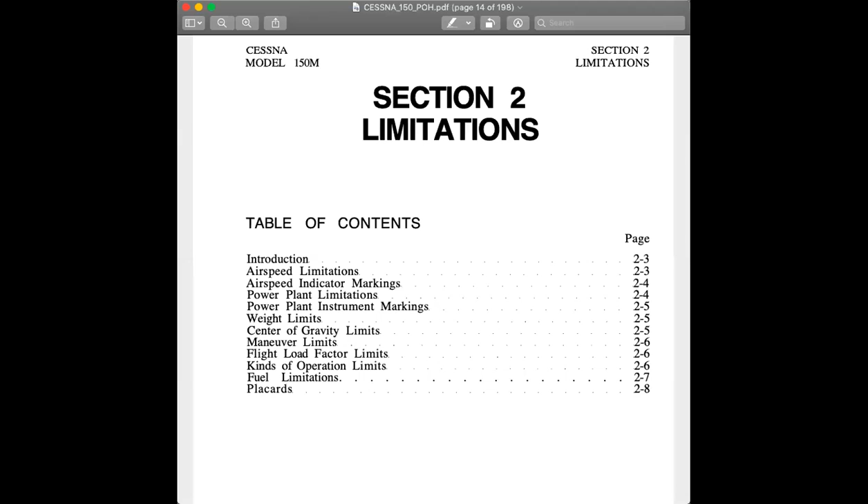Let's move to this - you're looking at a Cessna 150, 1977 POH. I saw it looked like there is a 150 associated with Girls Love to Fly, so I figured this would be an appropriate section to look at.

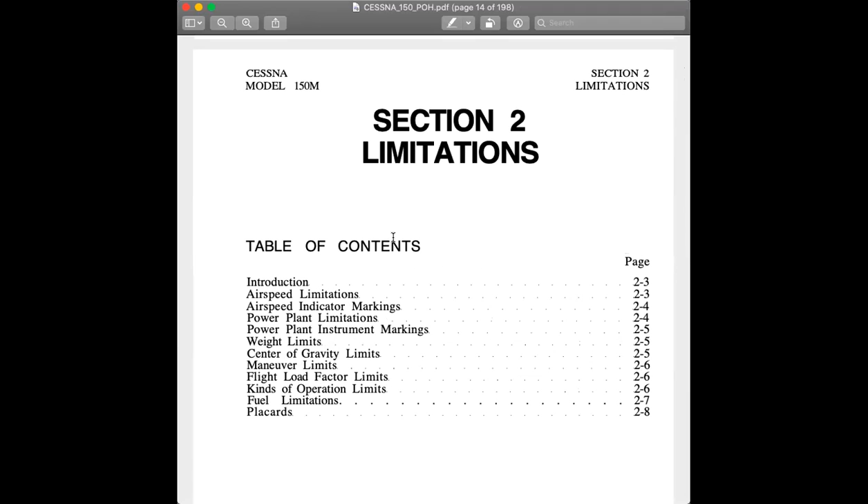Overall aircraft limitations - the limitations on any airplane are there mostly to keep everybody safe, and obviously these airplanes are not indestructible. So by having aircraft limitations and being familiar with and knowing our limitations, that helps us operate within, and ideally up to, the full operating envelope of our aircraft, taking advantage of every ounce of performance it has, while still understanding where those limits are, so we don't put ourselves in any undesired aircraft states or hurt the airplane.

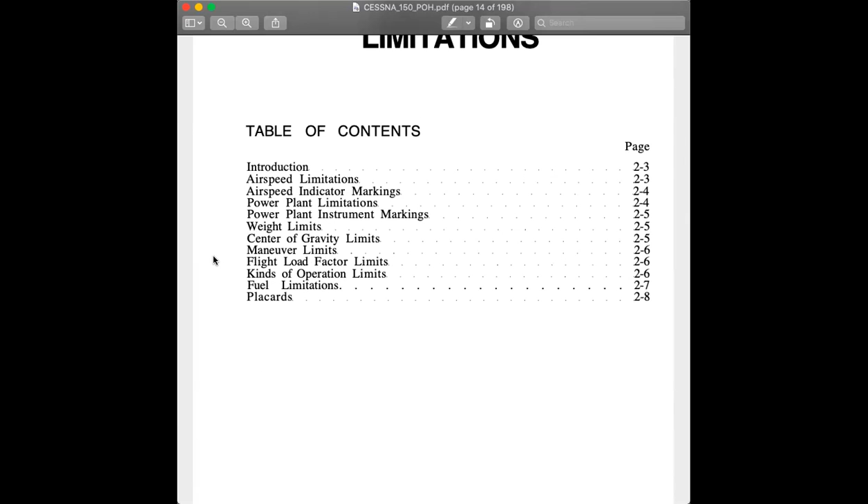Where these limitations really come in - just a couple notes in the beginning - especially I like to stress this with older airplanes: when you're looking at airplanes from the last century especially, the training fleet is aging. So definitely take into account that even though your aircraft POH or flight manual publishes the limitations, there might be a difference in terms of what you actually experience in the airplane.

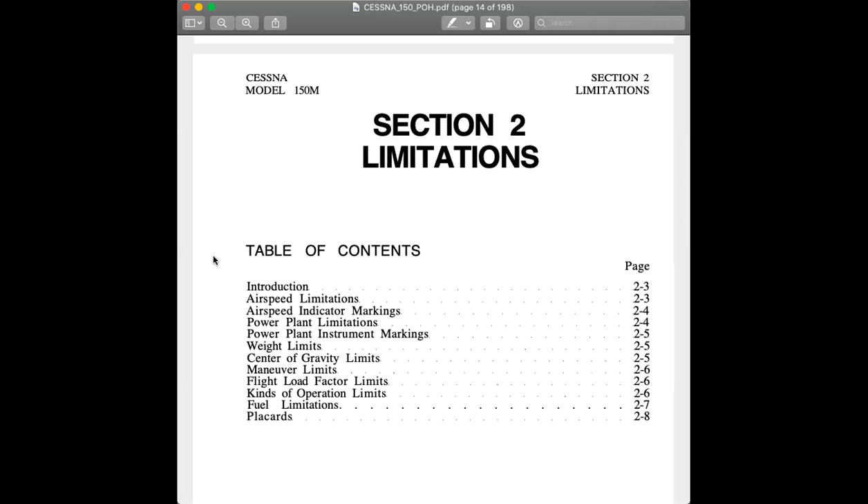I say this because just because the airplane was certified to a certain standard when it was brand new, does not mean that 40 years later that airplane can be expected to measure up to those same standards after training potentially hundreds of pilots and being beat up for a number of years. So definitely take all of these with a little bit of a grain of salt as we move through some of this.

So off the bat, everyone's mostly familiar with airspeed limitations, right? We're generally associated - the first thing we think of with limitations, we think of airspeeds, right? V speeds specifically - mainly, that's just the maximum speed or the minimum speed you need to be at for certain maneuvers. There's always a speed we seem to associate, but a lot of people don't necessarily dive into why these speeds exist or what that looks like from an aerodynamic standpoint. It's just a number that we're taught, and we just kind of accept that number.

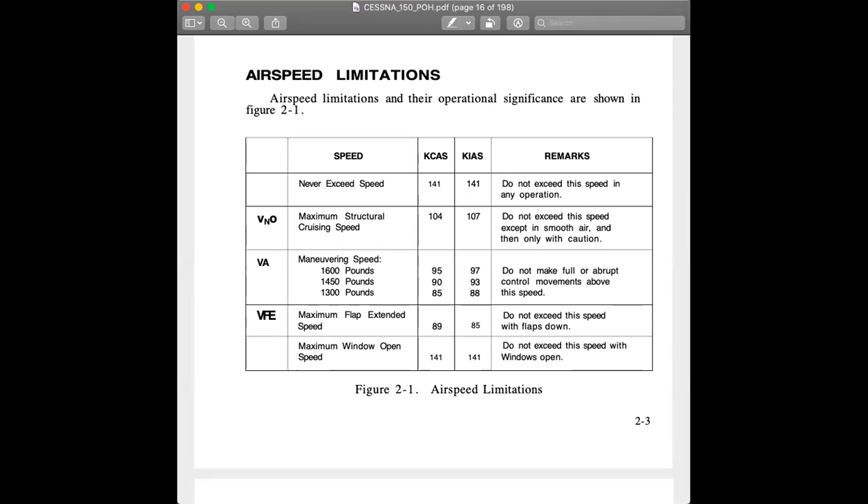VNO, max structural cruising speed. The POH limitations section is really good at just saying, here's the speed, this is what it means. Every manufacturer does have a little bit of a different interpretation of this. They're generally supposed to fit into the same mold, but sometimes you'll see that manufacturers do exercise a little bit more discretion when it comes to these speeds.

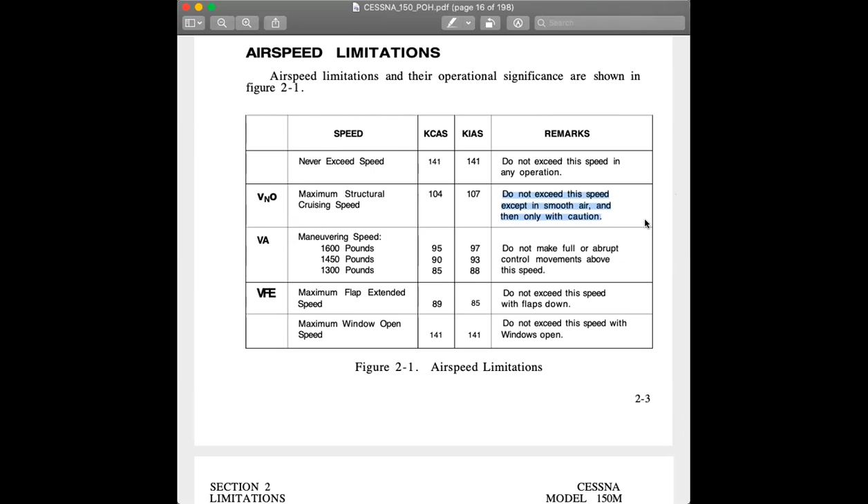VNO, how do we normally indicate this? Anybody have any thoughts on how this is normally indicated on your airspeed indicator? The yellow arc. Thank you, Christine. I appreciate that. And I'm going to just start calling on people at some point. So yes, yellow arc, maximum structural cruising speed, right?

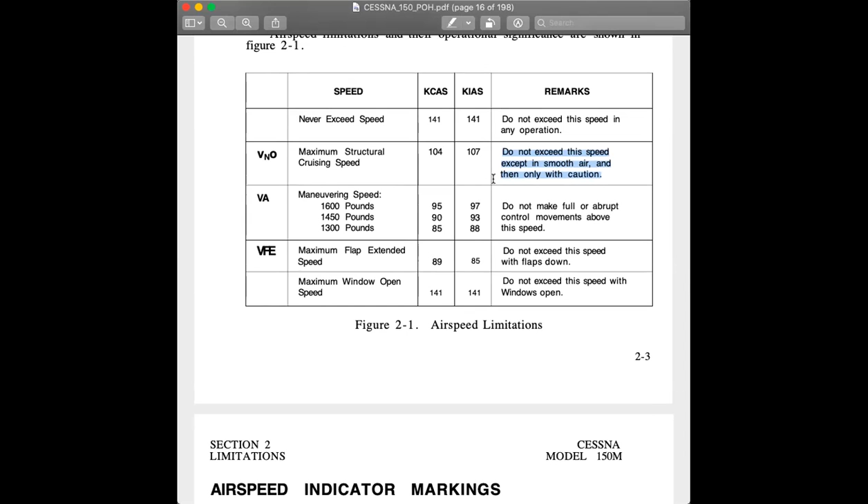And that's a speed that says do not exceed this speed except in smooth air, and then only with caution. So this is one of those kind of debated topics. If you're doing an emergency descent or something of that nature, how fast do you really want to be going when you're going downhill, especially in turbulent air? If you're trying to put out a fire or something like that, that's potentially a consideration, especially if it's on the wing or up on the forward side of the firewall, in your cowling. But still, definitely a speed you want to take with caution if you're going to exceed the structural cruising speed and accelerate into that yellow arc.

Maneuvering speed. Okay, maneuvering speed. Let's see, what do we typically associate maneuvering speed with? Any ideas why we have maneuvering speed, why it varies based on weight or anything like that?

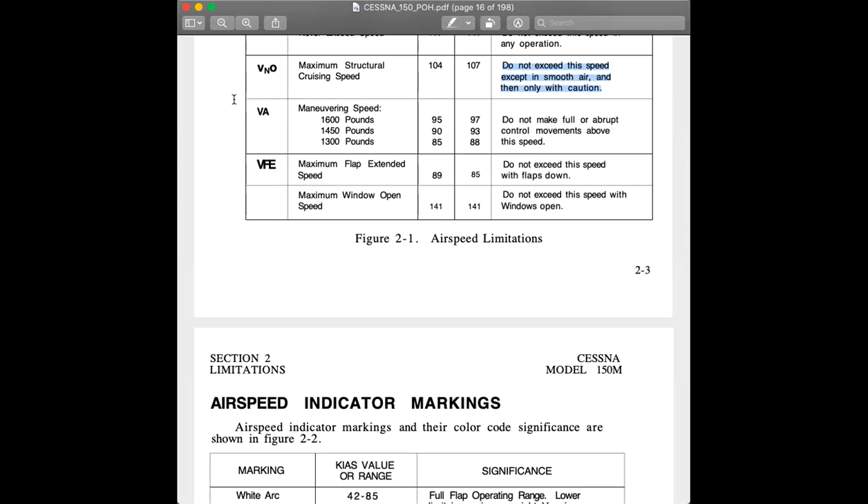Christine? Yes, I'm pretty sure it goes with the loading of the wings, right? So when we're doing heavy maneuvers, we increase the load that we put on the wings. And so that weight is very important.

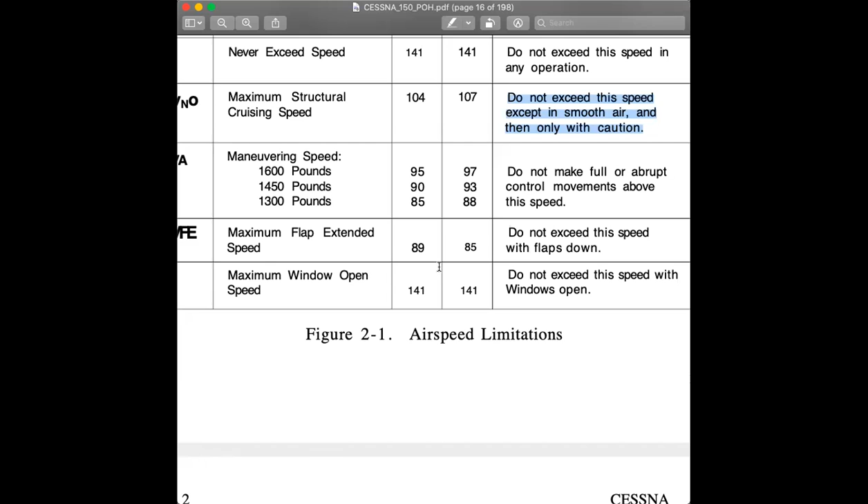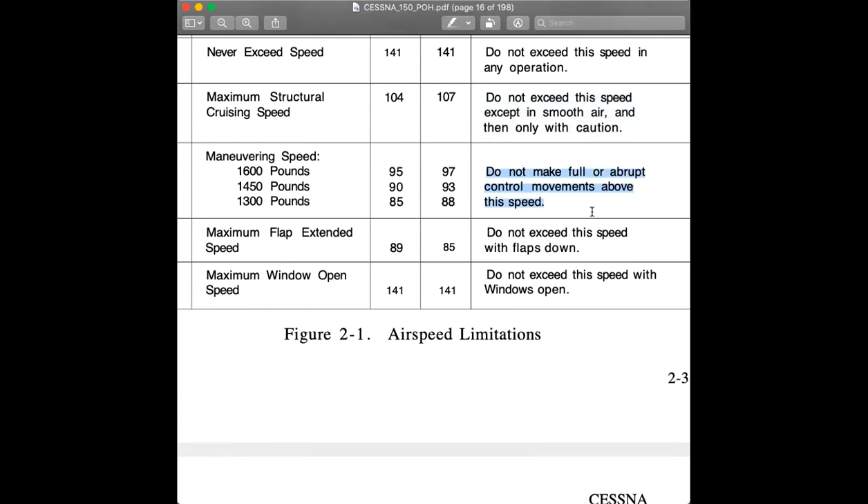Yeah, absolutely. So maneuvering speed, if we start with the description, it says do not make full or abrupt control movements above this speed. This is a 1977 POH, so it doesn't necessarily reflect what a maneuvering speed is, it just says don't make full or abrupt control inputs above this speed. And then it says here's some speeds, but also here's some weights. We can see that if this is knots indicated airspeed, as the weight decreases, the speed also decreases, and vice versa, as the weight increases, the speed also increases.

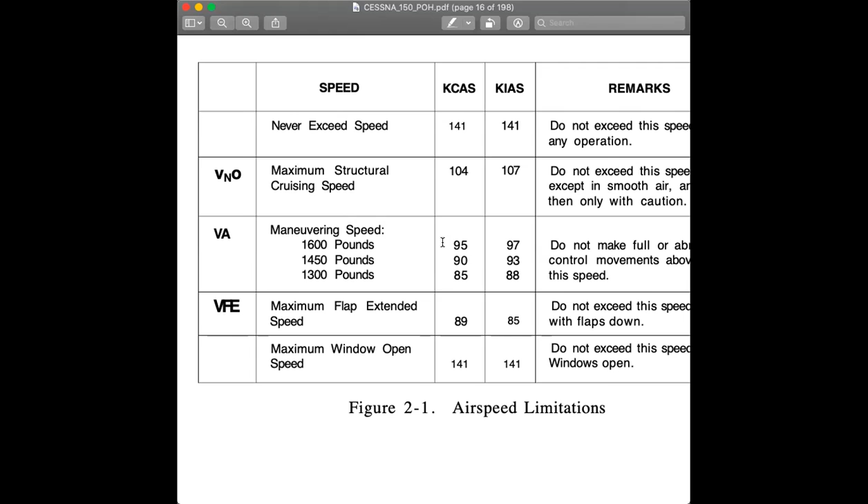But don't make full or abrupt control inputs above the speed, that doesn't really help us understand the why factor there. So that's essentially what we would call rote level knowledge, where it's like, okay, I understand this is the speed, don't do this, but we don't really understand why. So let's dive into that real quick here.

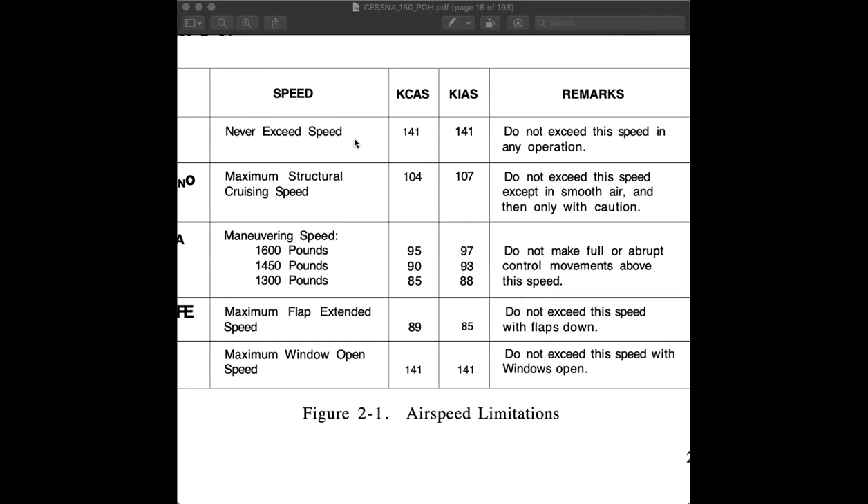I'm going to see if I can put a different window up. Let's go back to, there's a built-in whiteboard. Wow, okay, this is part of Zoom, that's cool. I'll use this instead of the proprietary one, I guess. Okay, so when looking at maneuvering speed, this might get a little bit mathematical, so feel free to stop me at any point in time here.

If we are looking at your average airfoil, try to bear with me here while I draw wings. I lost my stylus, didn't find it for the meeting, so I'm going to be using this as a trackpad. This is an airfoil, just pretend it's nice and round and smooth, and this line I just labeled right here, what line is this? Ideally going from the front leading edge to the trailing edge. Christine? It's the chord line.

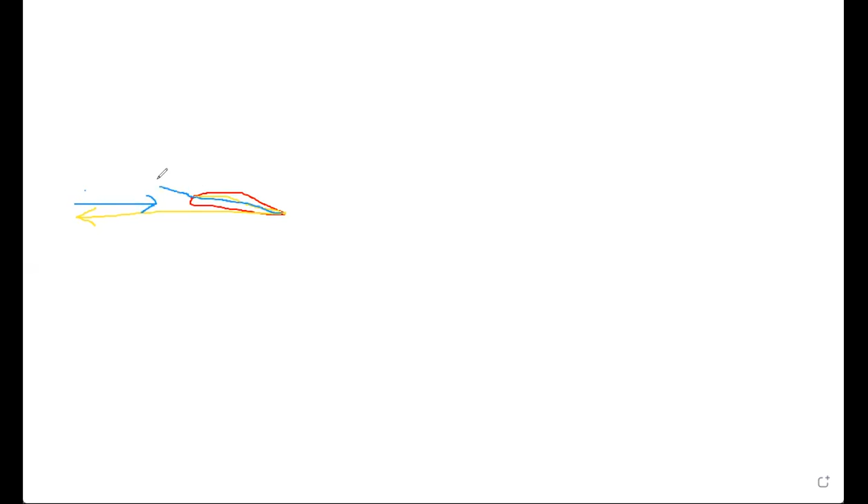Right, and the chord line is something that helps us figure out a very integral part of how our airplane flies, known as the angle of attack. So if our airplane is flying in this direction, the relative wind is always parallel and opposite to the flight path. So the airplane's flying that way, and the relative wind is parallel and opposite, going like this, then the relative wind is striking the airfoil up here at the leading edge. Now, if this chord line, again going from the trailing edge to the beginning of the leading edge, if we extend that in front of the airfoil up here, the angle between that chord line and the relative wind is known as what?

Let's see. DeVry? Lurking in the chat. Christine, I guess you're it today.

Sorry, angle of attack, right? Okay, so if we're going to look at this a little more mathematically and try to understand why maneuvering speed is changing, we first need to trust me here for a second and go with an out-of-the-box rote definition.

So VA is the speed at which you can apply full and abrupt control input in a singular axis without damaging the aircraft. Now, even that doesn't necessarily help us understand—it just says we won't damage the airplane. Well, how do we not damage the airplane? By applying full and abrupt control input.

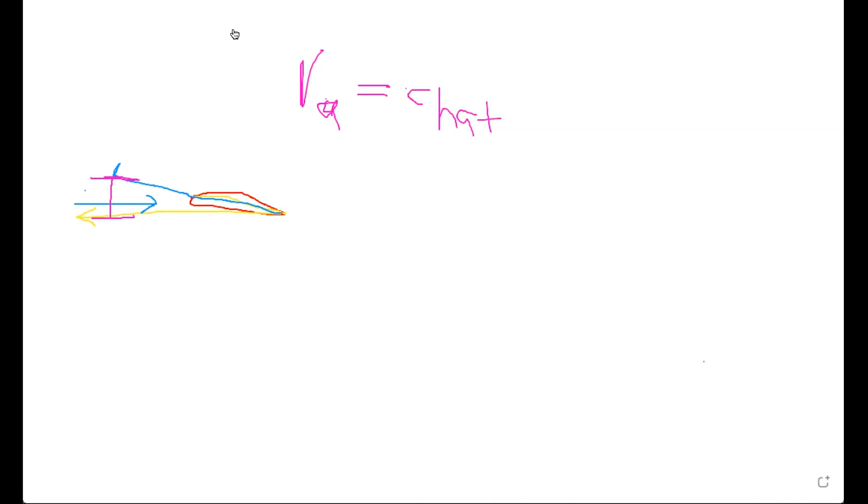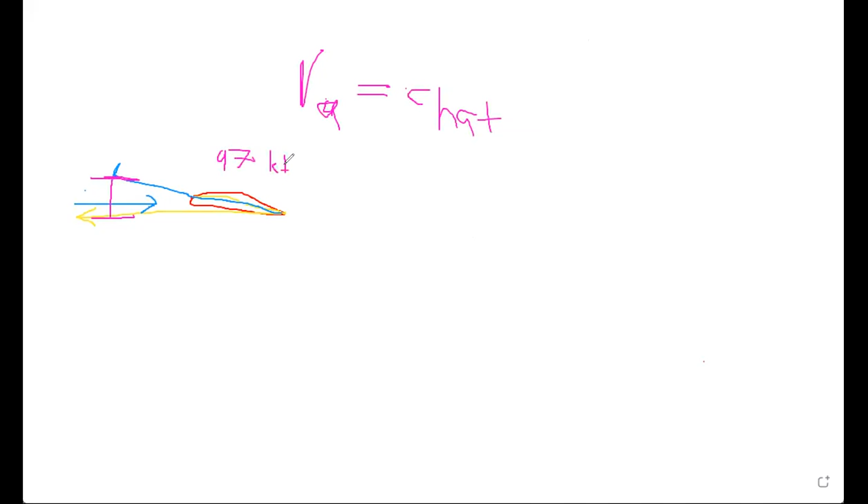So if we go back to the airfoil diagram here, let's go back to our POH and read those numbers. It says at 1,600 pounds, it's 97 knots. Okay, 97 knots, 1,600 pounds.

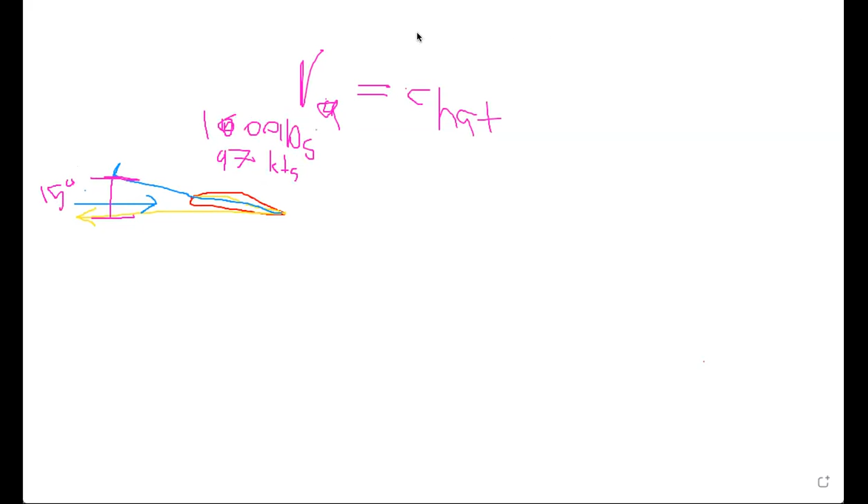So then you have a given angle of attack. At 97 knots and 1,600 pounds, you have this angle of attack, which we'll say is like 15 degrees—this is a somewhat arbitrary number. So if this is your angle of attack at this weight and speed, we're also concerned, if we're going to stall before we damage the airplane, that we need to hit the critical angle of attack before anything bad happens. So the critical angle of attack might be up here.

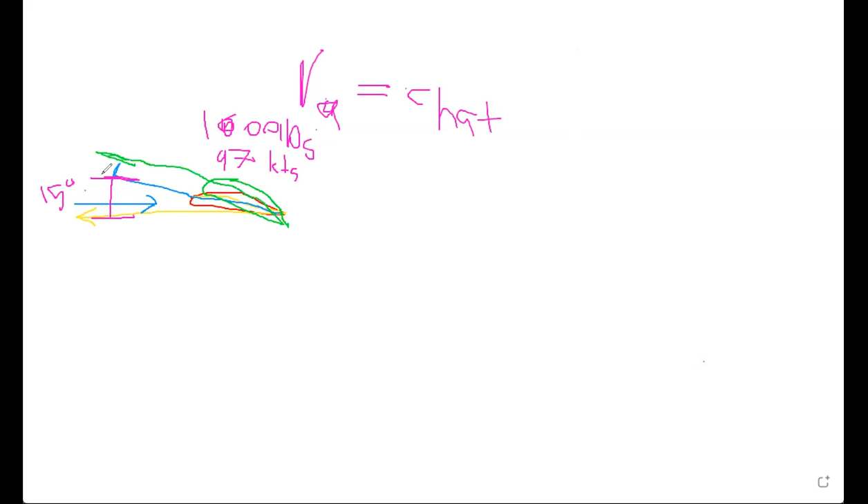Okay, so if the airfoil was reshaped and we increase our angle of attack like this—this is our new chord line—and it goes all the way up here, then this is the angle of attack we would actually stall at. So if we're at 15 degrees, let's say we stall at 20 degrees, then we have 5 degrees of angle of attack change. So if you're flying along at 1,600 pounds and 97 knots, and this is your angle of attack, you'll basically hit 20 degrees pretty quickly and you won't stall or break the airplane.

But now let's look at a different situation. Let's say, based on that POH, at 1,450 pounds it's 93 knots. So as weight increases for straight and level unaccelerated flight, what happens to angle of attack?

Christine, you're a CFI, right? I am, yeah. No worries, but it's Christina. Oh, it is, sorry. And I didn't hear your question, if I'm being absolutely honest. No worries, I was asking—I'm like, okay cool, you're a CFI, excellent, you can help me out here a little bit.

So as we're cruising along in straight and level unaccelerated flight, if we had two identical airplanes, and on one of those airplanes we just added some weight, what would happen to our angle of attack? I guess it depends on where that weight is. Okay, that's actually a good answer—that's how you got me on a technicality there.

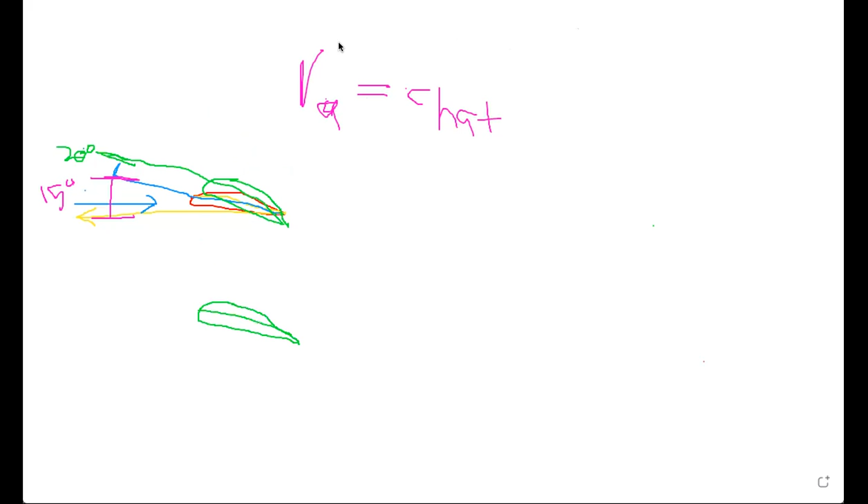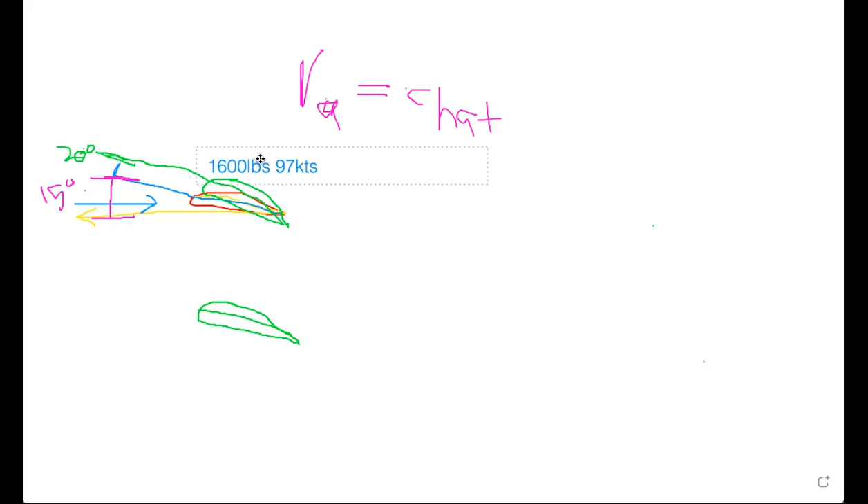So let's just say—and actually I figured out how I can do text, so I'm going to clean this up and make it a little more legible. Let's go 1,600 pounds, 97 knots on this wing. Nice, and I can move it. So then if this wing is, let's say, at 1,450 pounds and 97 knots...

Okay, so this wing here is lighter, right? The bottom wing is at 1,450 pounds. So if it's at 1,450, 97 knots, does it have a greater or lesser angle of attack than the wing above? It has a lesser angle of attack.

So in this case, let's say wind would be like this, because the flight path is like this. And then as a result—there we go, there's the angle of attack. We'll say, and this is not to scale, we'll say this one's at 10 degrees.

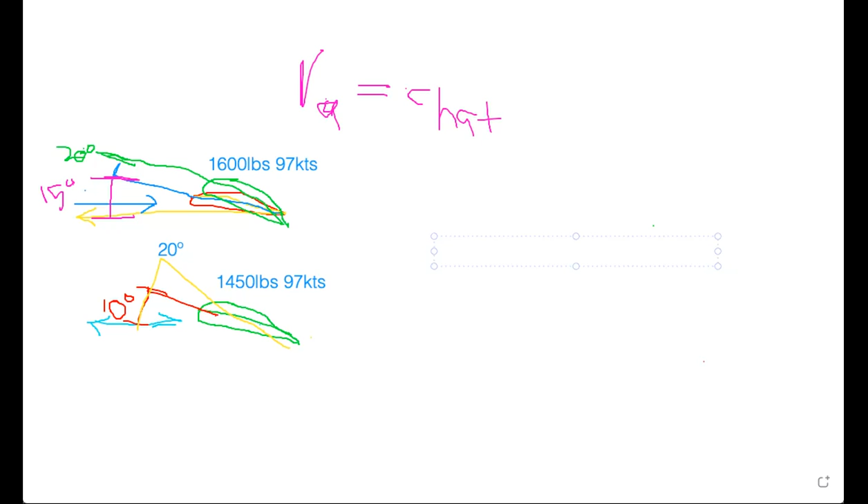In terms of like math terms, this would be known as... just put a bunch of symbols out here... would be the delta, change in AOA.

Okay, so the change in AOA is greater, so that's going to translate to a higher load factor. So also looking at limitations, what is the highest? What are the normal category load factor limits?

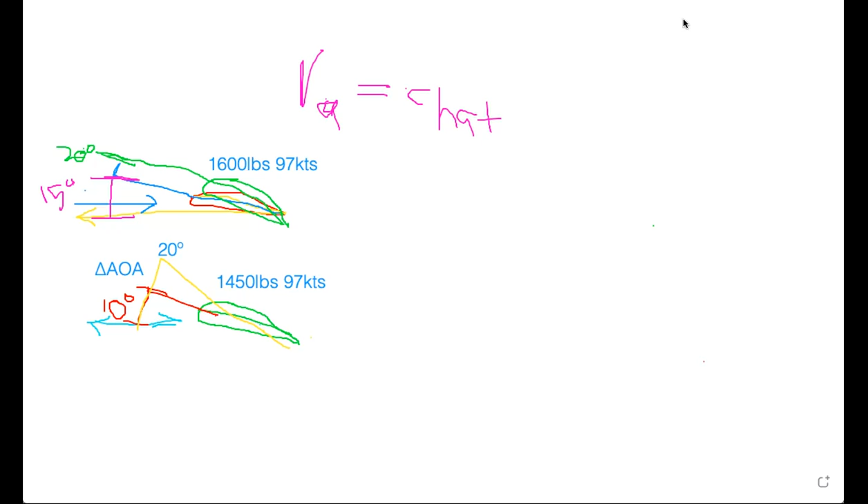Anybody have any idea? Normal category load factor limits? 3.8 positive G's. Okay, and then negative is 1.52 G's. Okay, now why do we care about this?

Well, this is how our maneuvering speed actually works, in terms of this change in load factor being equivalent to the amount of load factor we're able to actually put on the airfoil. Most people associate G-forces with an actual solid number, as opposed to like a numerical value. But in reality, G-forces are an acceleration.

So instead of being like a solid number, like 100 knots is just a solid normal numerical value, a G-force is actually something that should be expressed in terms of like a foot-pound, like a torque, or like meters per second squared, because it's a measure of acceleration.

And so looking at our POH numbers in our two different airfoil designs, if 97 knots protects you at 1,600 pounds, the reason it would drop at 1,450 pounds is because you're able to put more acceleration on that airfoil before it stalls, which would translate to a higher G-force, which would translate to more weight on the airplane.

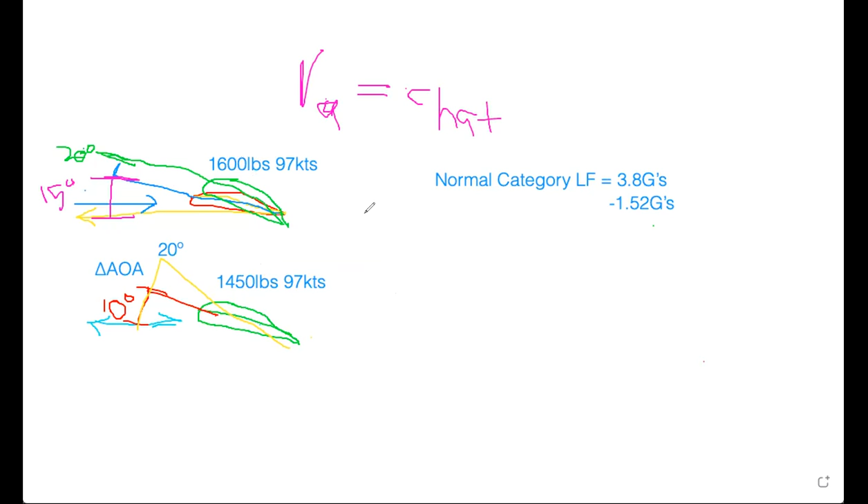So let's just for a second dive off into some mathematical realms. The formula for lift, don't worry about memorizing this, is lift equals one half... find some Greek letter here... we'll just go with X, it's not X, but it's not P either... 1/2 rho V squared S C L. Okay, so 1/2 rho V squared, surface area, coefficient of lift.

What this is referring to is how much lift is being generated by your airfoil. Now, I don't want to get into this too much, but let's just say that you're at 1,600 pounds with airfoil 1 over here, and you're in a steady, level turn at 60 degrees bank.

You're pulling 2 Gs. So then, how much weight would be supported by the wing, Christina? If we're in the 60-degree bank turn, so we're pulling 2 Gs, twice the weight of the aircraft, right? So two times the weight of the aircraft if we're at 1,600 pounds. Exactly. So it would be twice 1,600. So we would be at 3,200 pounds.

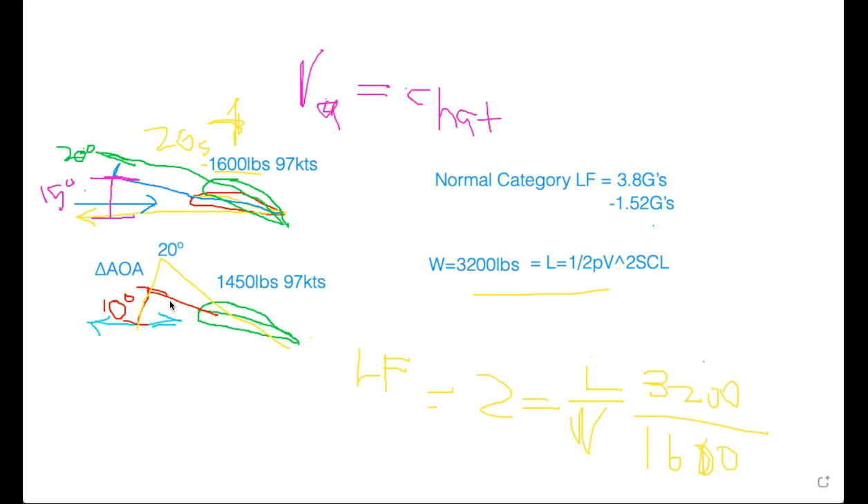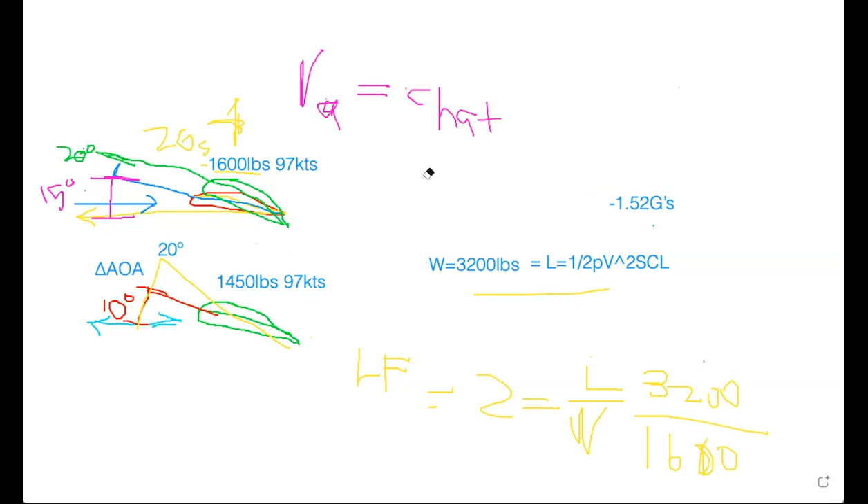But going back to our airfoils, we can now see that if the lighter airfoil is at the same speed with a lesser angle of attack, it's able to pull more G's and have a higher rate of change before it reaches critical angle of attack and stalls. Similarly, and conversely, this weight option also works. Let me get my eraser over here. This eraser is very effective.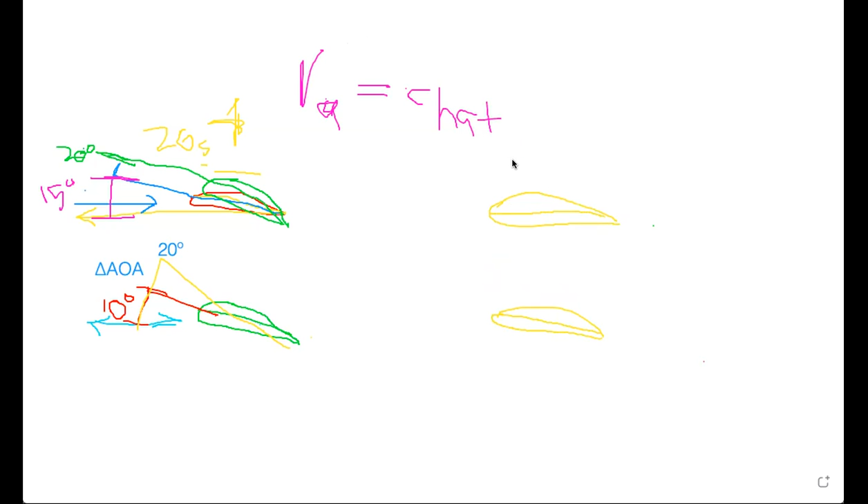We'll get another couple of airfoils drawn over here. So here's an airfoil that's going to depict a very similar but different relationship. This airfoil, very high camber airfoil, we'll say that. Change the angle of attack on this one. Don't mind my weird drawing, trying to make this somewhat understandable. There's a chord line, a lesser chord line. If both of these now weigh the same, we'll say both are 1,600 pounds. This is also 1,600 pounds.

Some viewer input here: if these drawings are to scale and do in fact represent the actual angle of attack of the airfoils, and this one's effectively just about nothing. And this one, again, they're both flying level. So this one here has a higher angle of attack, right?

Which wing is moving faster, Christina? Which one has a higher velocity? I would guess the one with the smaller angle of attack. That would be correct, because with the smaller angle of attack, it is moving faster since that wing has a lower coefficient of lift. This is 93 knots. We'll say this is 97. Actually, we'll say it's 100. Okay, all right, that would be correct.

There we go. Those line up properly. So both weigh the same. This one's moving faster, so it has a lesser angle of attack. This wing is slower, so it has a greater angle of attack. But the lift on both wings is the same because both wings are in straight and level, unaccelerated flight. So we'll say equal lift. Okay, tracking with me so far? Is it all adding up?

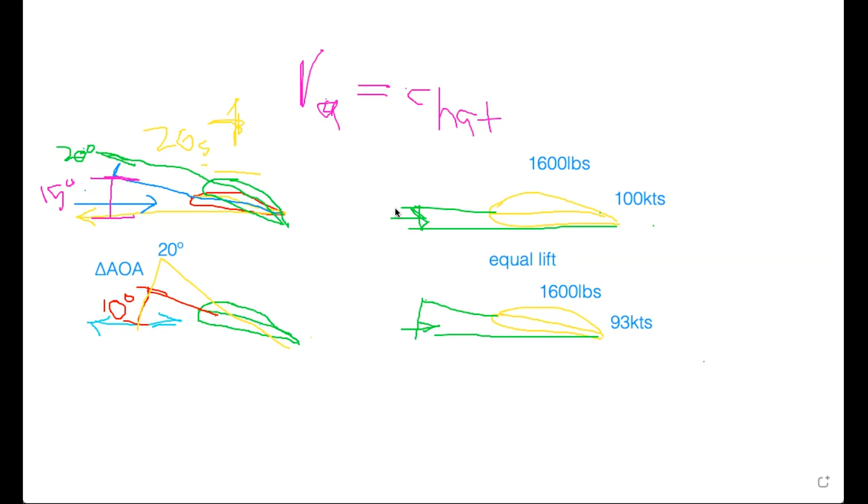Okay, that is a yes, thumbs up. Okay, sweet. All right, so that's the two examples.

This example on the left is based on both airfoils going the same speed, where I'm drawing now. Both airfoils are the same speed but they have different weights, so the angle of attack is changing. Over here in this example, they have different speeds but the same weight, so the angle of attack is changing on these two airfoils.

Okay, well what does this actually mean for us? We've seen that we have different angles of attack, which causes us to be maybe closer to or farther from the critical angle of attack.

How does this translate into the actual limit that we see here in the POH of 97 knots for 1,600 pounds, or 93 knots at 1,450 pounds? Well, what we're ultimately looking at is the adjusted accelerated stall speed.

Let's see if I can do a little adjustment here. There's no cursor, perfect. Okay, we are able to actually calculate how fast we will stall at a given load factor.

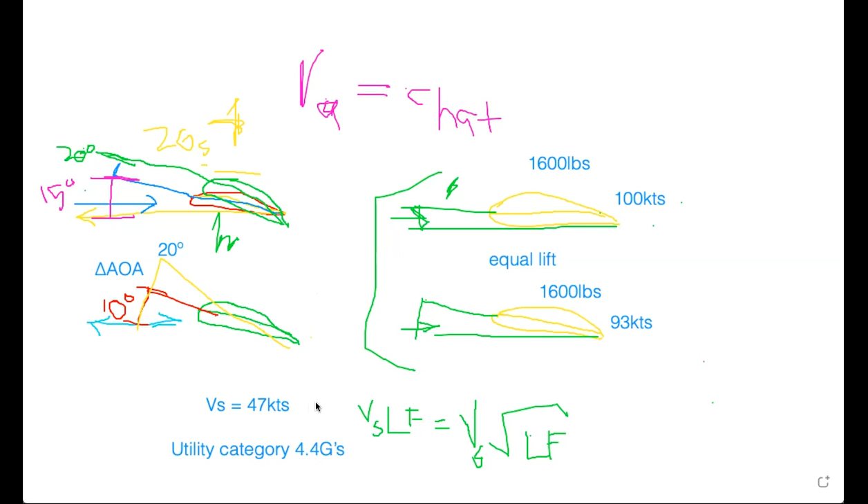And the reason for that, and the reason that this actually matters to tie this all together, is that with these different angles of attack that we're associating over here at the different speeds and weights, if we take an airplane that's at say 1,600 pounds and we multiply that times 4.4, we end up with 7,040 pounds.

But now if we're lighter, we'll use the POH number for 1,300 pounds, which is a lower speed. 3.8 times... sorry, let's see, 1,300 times 4.4 is 5,720. And then 1,600 times 3.8 is 6,080 pounds.

So we're within a couple hundred pounds. So what this is telling us is that at this weight, at 1,600 pounds, if you apply full and abrupt control input and move the control all the way to the stop, then at that point you will have a certain amount of weight that is being supported by the wing to generate that lift, and then you will stall.

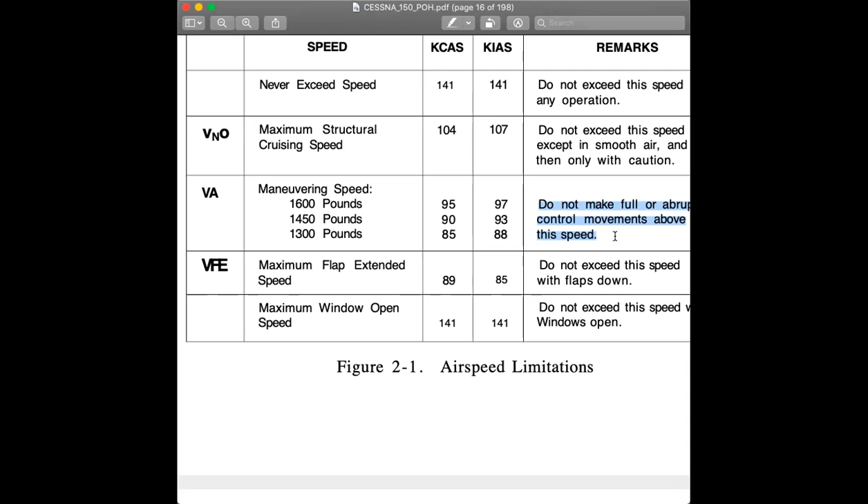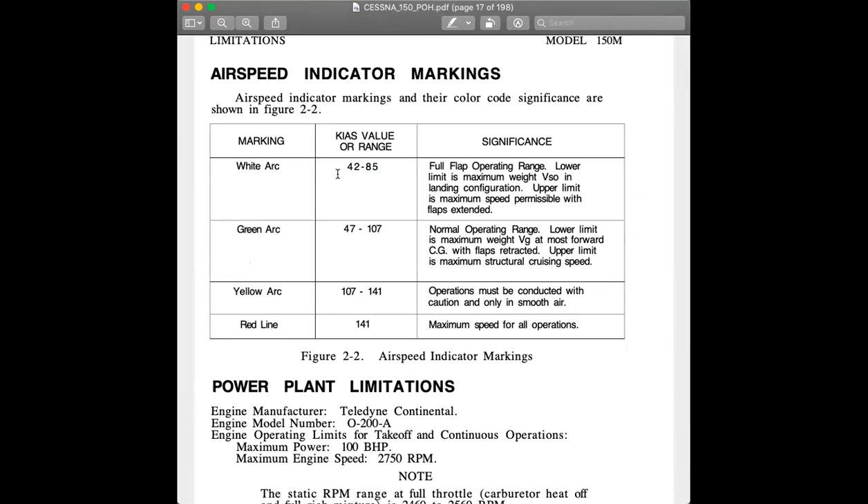So anyway, we have flap limitations. Obviously that's in there: maximum speed you can extend flaps, and the rest of the V speeds we're familiar with. The white arc being your operating range for extending flaps, and then the speed that you'll stall with flaps out. Green arc being your flaps up.

There are some good notes in here, your flaps-up stall speed as well as your normal operating range. It says the lower limit is maximum weight, VG, at most forward CG with flaps retracted. Upper limit is maximum structural cruising speed. So it does help you understand in the limitation section of your POH exactly how they tested this.

For instance, the white arc is where you're going to stall with flaps out, but it says VSO in landing configuration at maximum weight. So how often are you landing your airplane at maximum weight? Probably not often. And we also know that if you're not at maximum weight, you're supporting less weight.

So if you're at the same speed as we just talked about with the airfoils, going over some of those aerodynamic concepts, then you're at a lesser angle of attack, which means you would have more angle of attack available before you stall, which means it's going to be slower than this value of 42.

Continuing with the green arc, it also says maximum weight at VG at most forward CG. So obviously if you had a bunch of baggage, right, what's going to happen with that, Christina?

Oh, she's gone. No, I'm still here. If I'm at... can you repeat that?

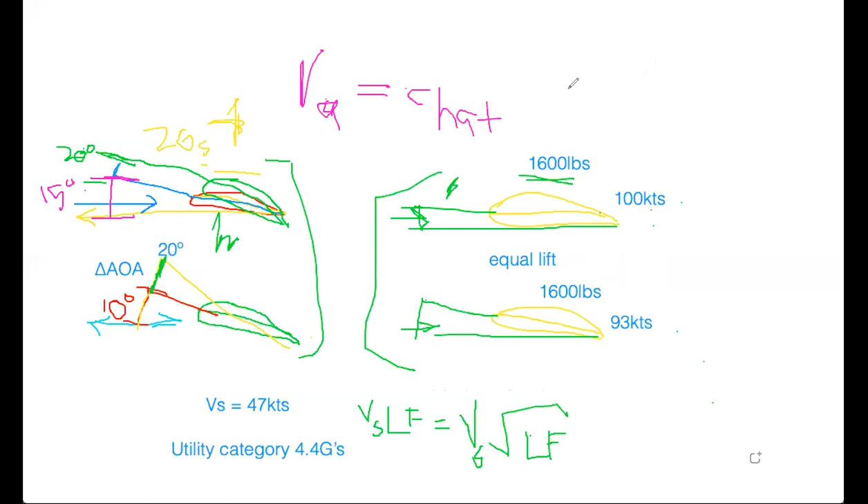Okay, so if the airplane is a teeter-totter, and this is the main wing here, and then the horizontal stabilizer/elevator combination is an upside-down airfoil, the camber is on the bottom. If this is the tail, it's generating a force down.

I have an arrow tool. We'll ask the people at Zoom. Oh nice, generating a force down while this wing is lifting the weight up.

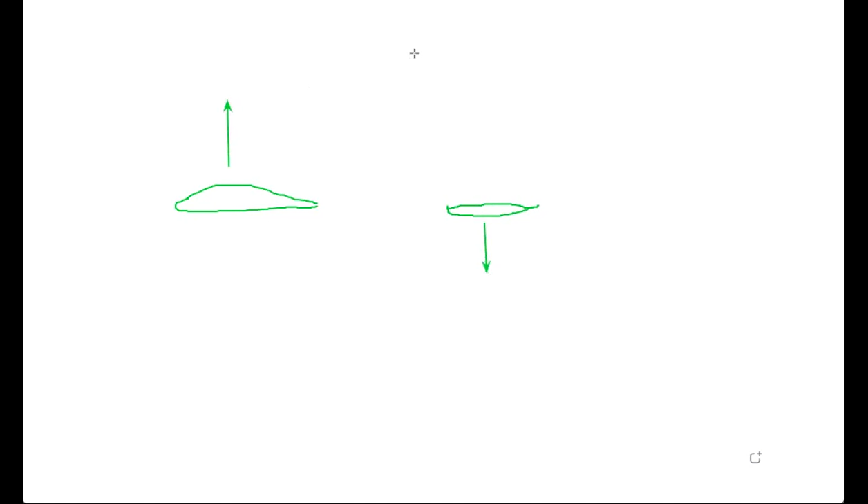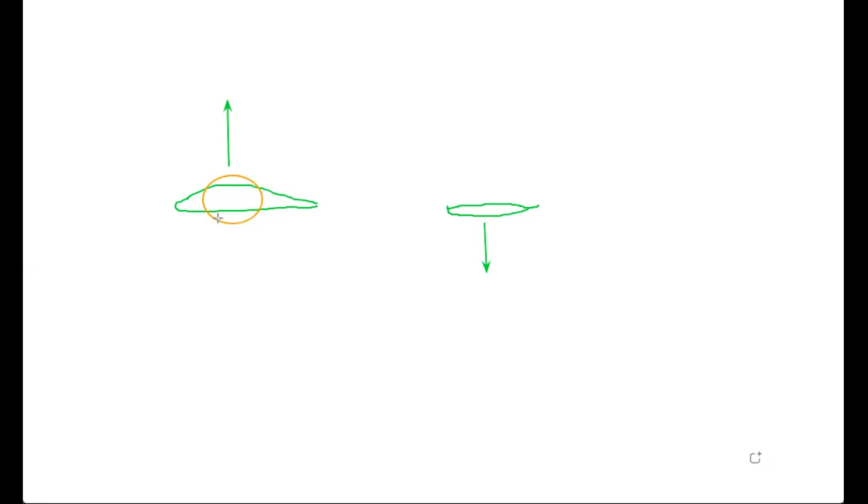So if the center of gravity is normally somewhere in this general vicinity, let's go with a different color, up here, located in the general vicinity of the center of lift. If the center of gravity is up here, then this tail generates a downforce in order for us to be able to balance our airplane.

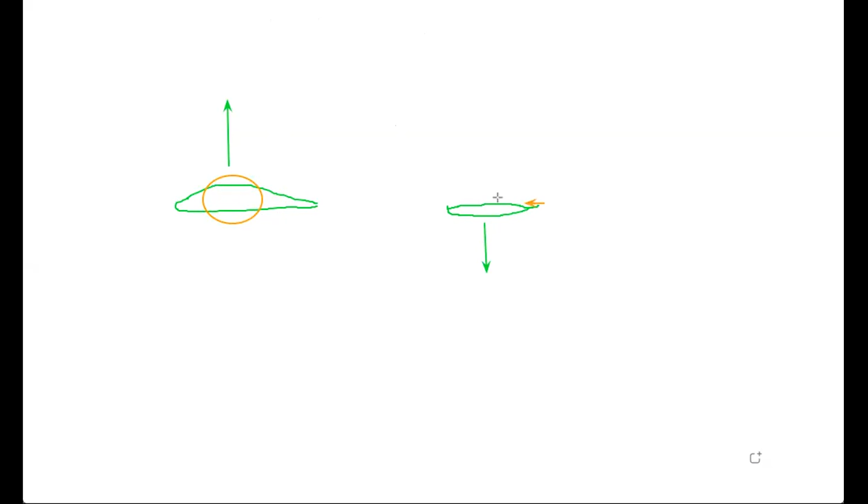And if this is our airplane right here, and our airplane's like a teeter-totter, whoa, there we go. Then why does it do that? It's rotating around this general axis right here in the middle.

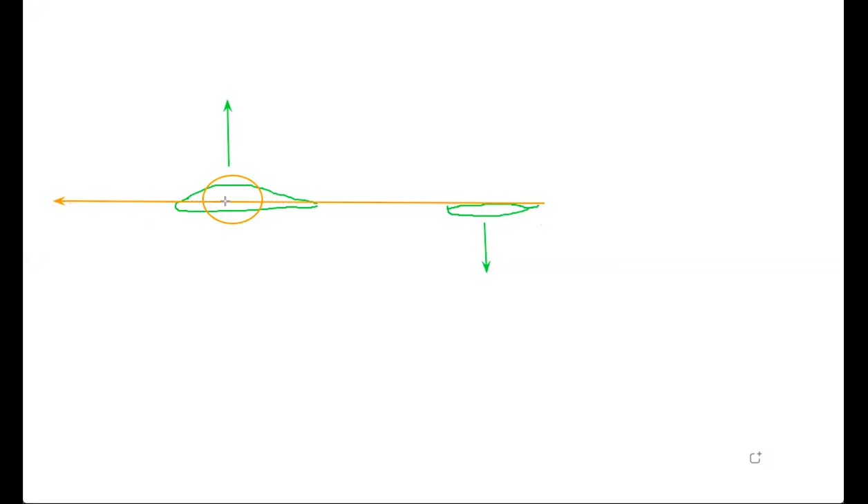So as the center of gravity moves this direction, the amount of downforce required by the tail decreases, right? It doesn't have to make as much force because more of the weight is distributed aft. Versus if the center of gravity moves forward, the tail has to make more downforce to balance that out because it's a longer arm back to the tail.

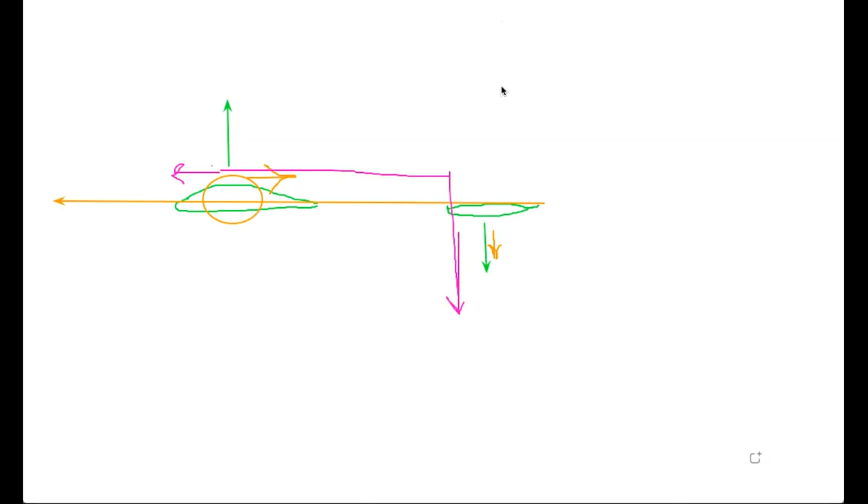And so it requires more downforce versus when the center of gravity is back here. Let's change it up again with lime green—no, that's the same lime green I had. Some nice blue colors. Versus the center of gravity being back here, the arm is not quite as long, which means the tail does not have to generate as much downforce.

So if less downforce is being required with a more aft CG, does that increase or decrease the stall speed?

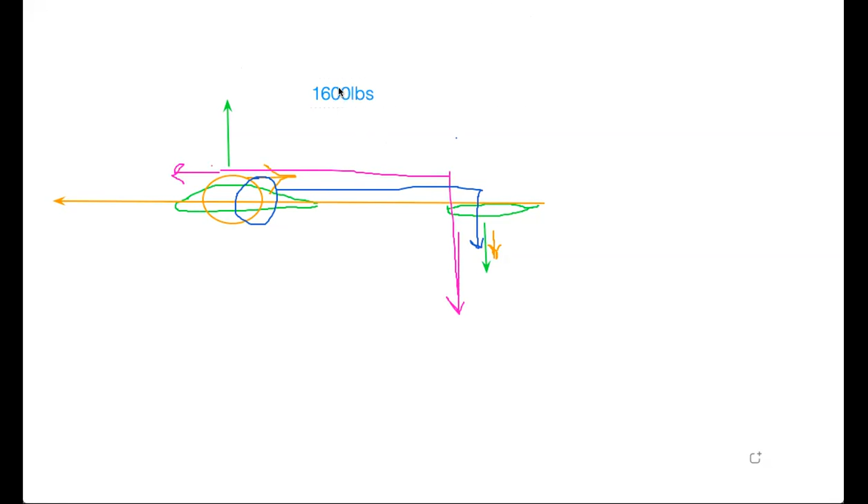It will decrease the stall speed. So if two airplanes have the exact same weight, let's just say 1,600 pounds, so it gives you a common theme. We'll say that this is kind of representing two separate airplanes.

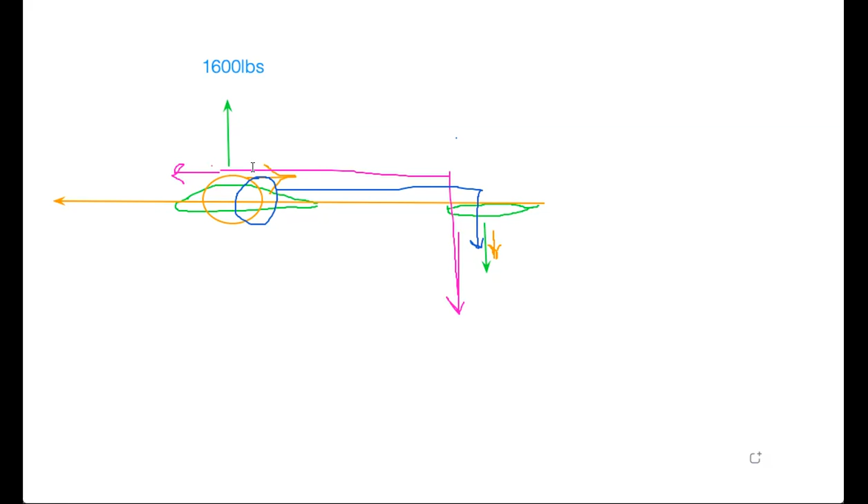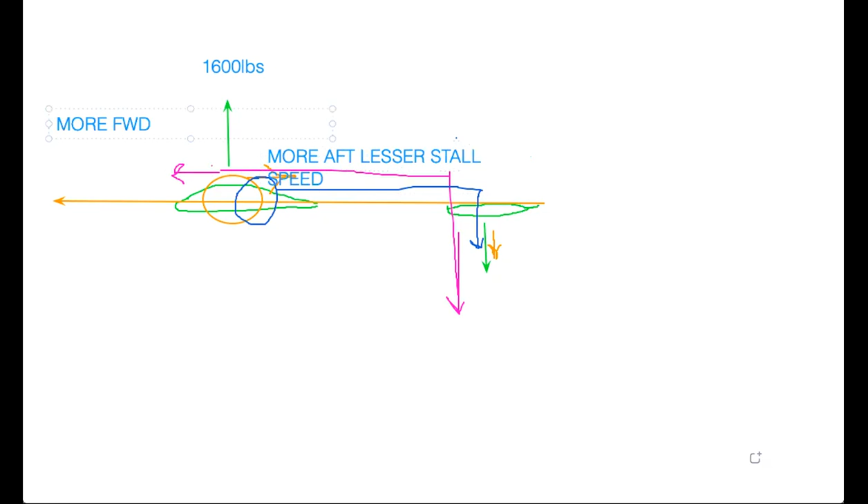Which, best way to draw this, which one will have a higher stall speed? Well, let's see, more aft, lesser stall speed. Boom. And then more forward, higher stall speed.

Okay, so let's see, where's my, still sharing the POH. Not. Okay. I see the whiteboard, you all can see it. I cannot see it. Oh, there it is. Okay.

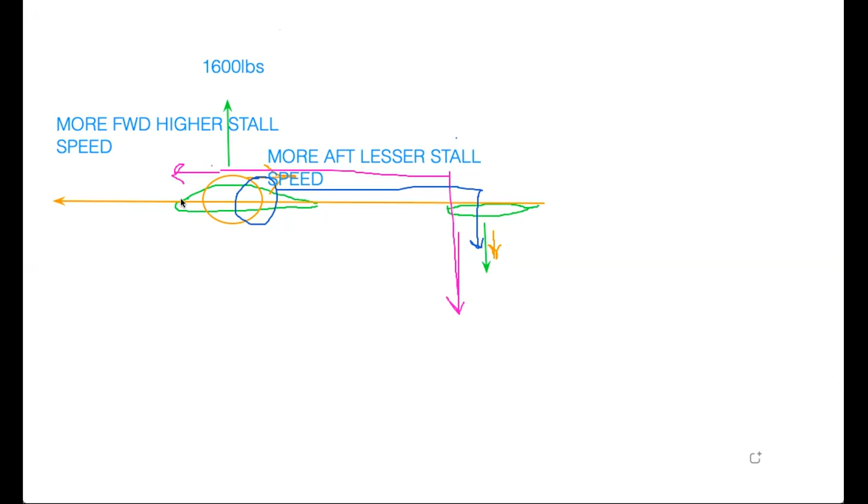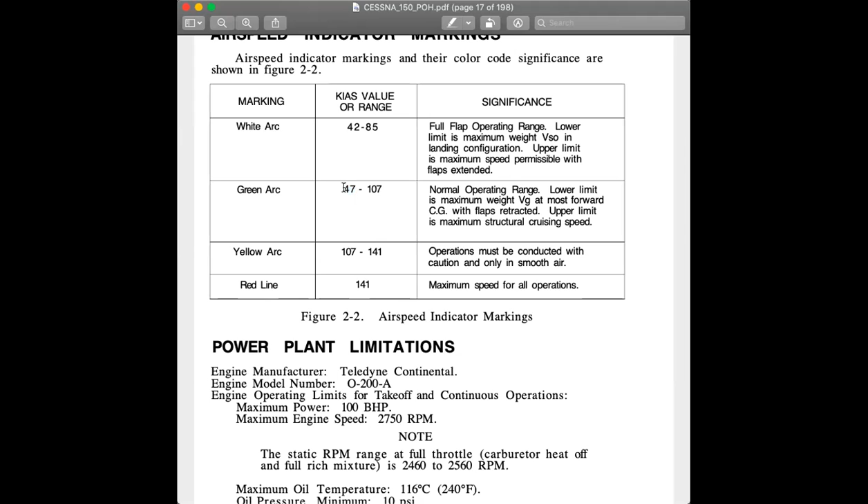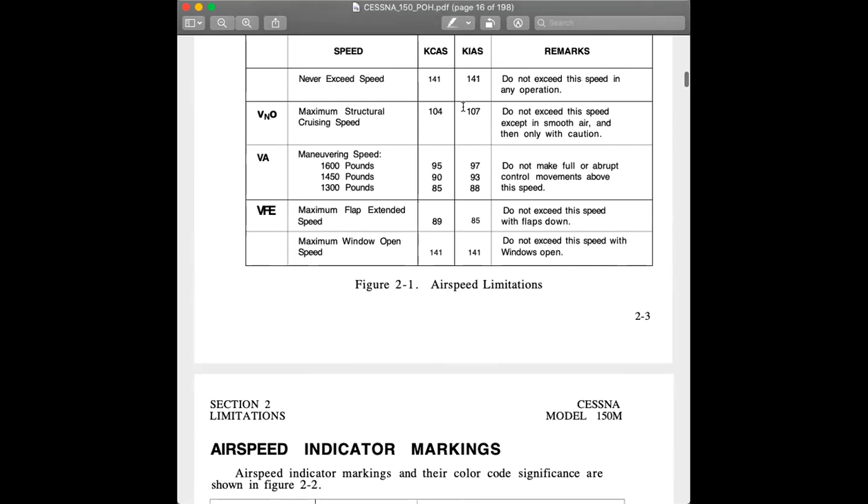The yellow arc, we talked about that. That's the VNO kind of indication range up here, VNO, right? Maximum cruising speed starts at 107 knots. That's where it begins, but that continues all the way up to 141 knots, and that's the smooth air range. And then red line, we know that is VNE, maximum speed for all operations.

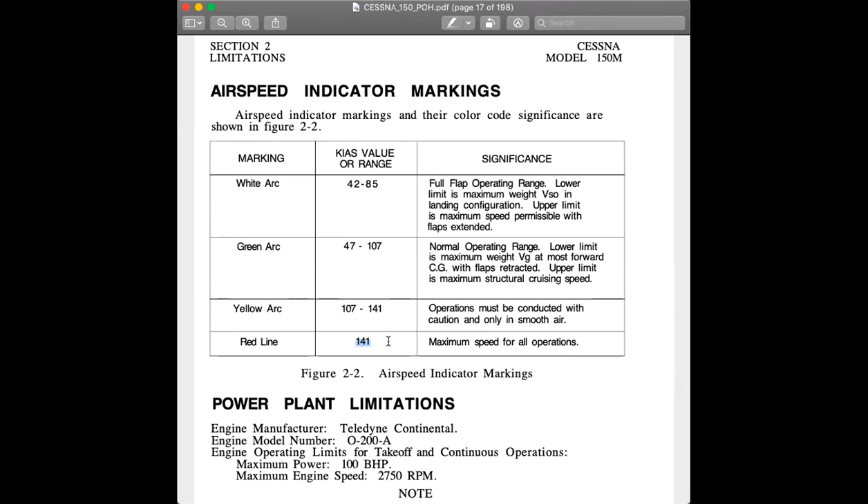Now, of course, being limitations, the V speeds are things that are there for your safety and protect the airplane. There are tolerances. So like red line being VNE, the airplane's been tested beyond that. It's like 115%. The load factor limits that we were talking about, we'll talk about more in just a second. Those are also, there's 150% extra on that. So the wings aren't just going to magically break off at...

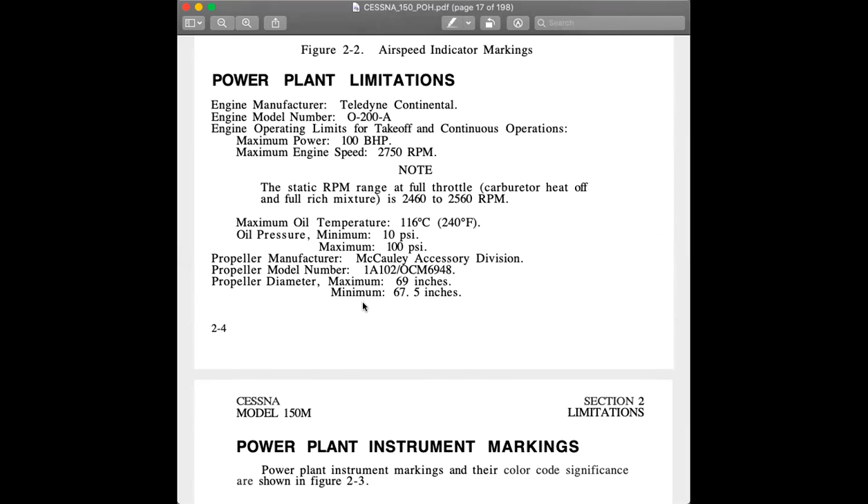4.4 Gs. You actually would have to get significantly more, I guess 4.4 times 1.5, you're looking at 6.6. So there's a safety factor that goes into all those.

Also important limitations before I move on. Actually, any questions on these speeds or anything like that? Going once, twice, 3 times. Okay, feel free to throw it in the chat later.

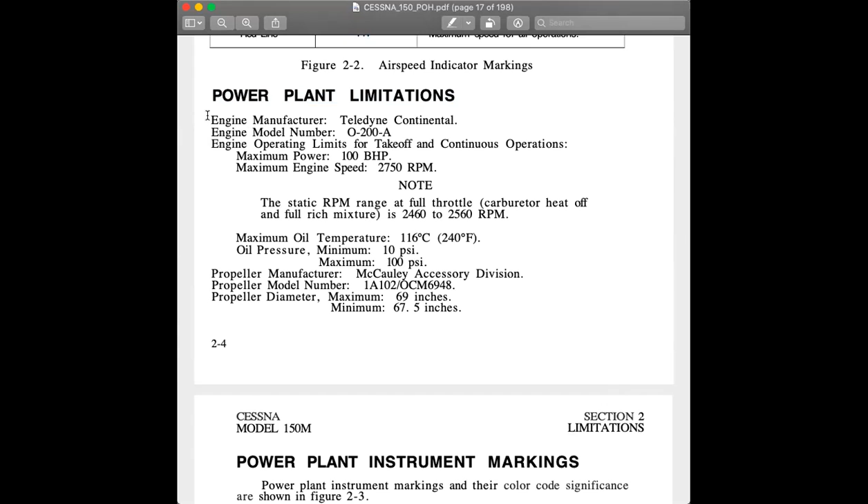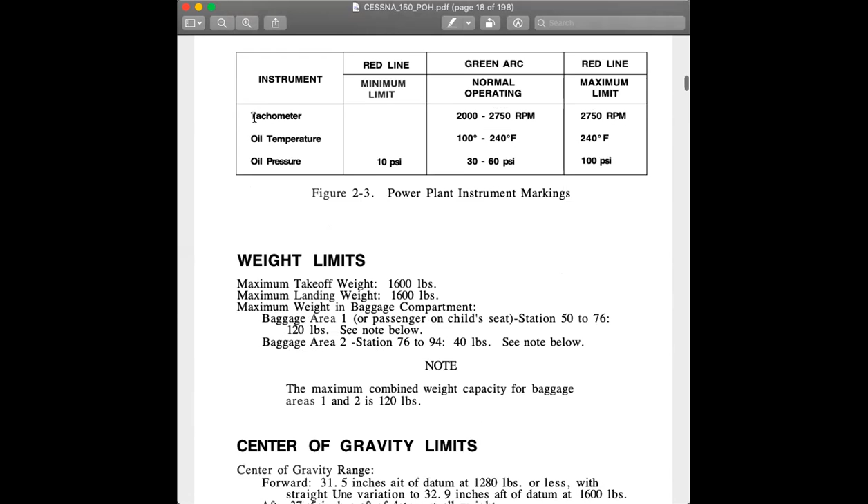If you do have anything, power plant limitations, horsepower, maximum engine RPM, oil pressure, things like that. Just generally good operating practices, limitations for operating your engine effectively.

Weights, we've talked about this. 1,600 pounds being the max gross weight. Max gross weight, of course, is a weight that you'll see pretty commonly in like training airplanes and stuff. You start looking at bigger airplanes, you start getting things like the maximum weight you can be out on the ground.

But then there's a maximum takeoff weight, which is less than that because they assume that if you load the airplane up to its maximum weight and then taxi to the runway, that you're going to burn off some fuel at some point, and so you might actually be able to put more weight in the airplane than you can actually take off with. That's another example of that. But this airplane just has 1,600 pounds across the board.

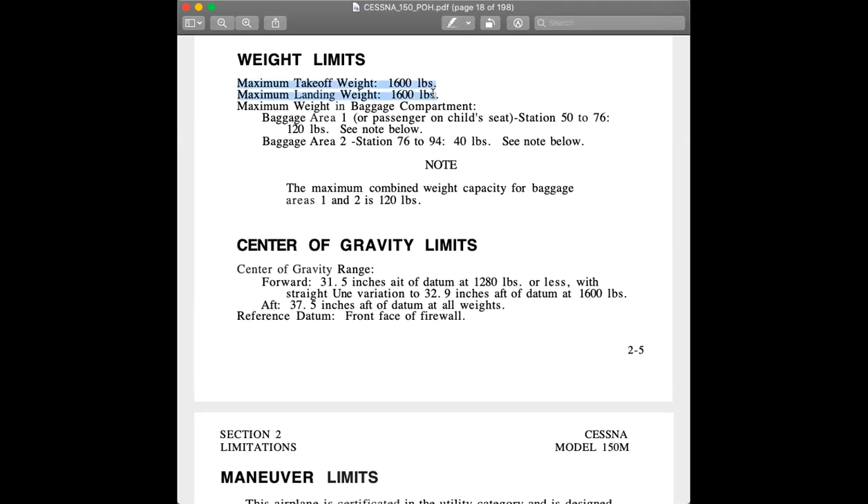Center of gravity limits, very important. Be familiar with those, right? In terms of like loading weight forward and aft.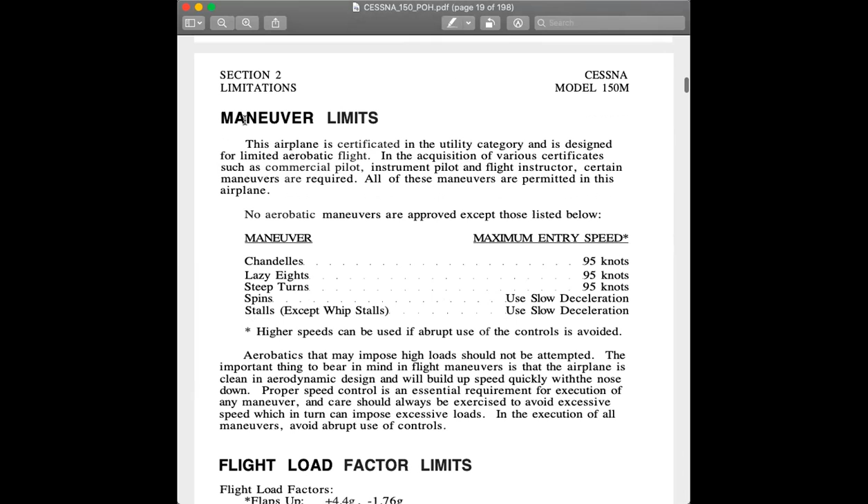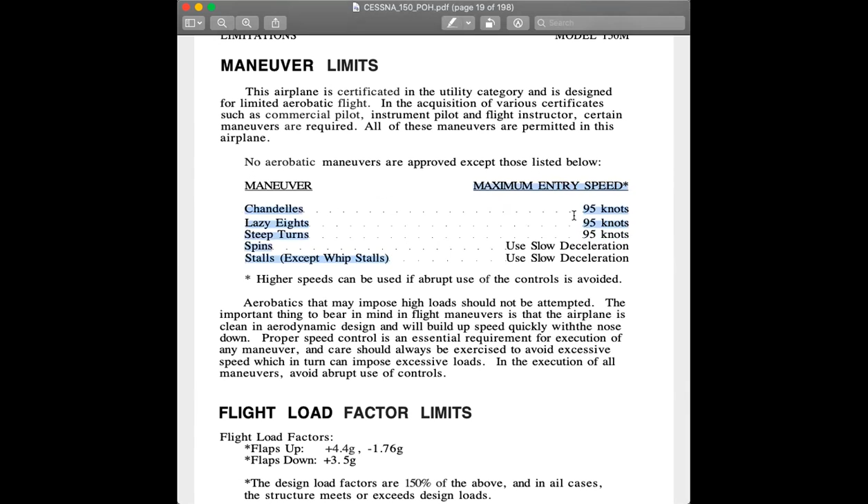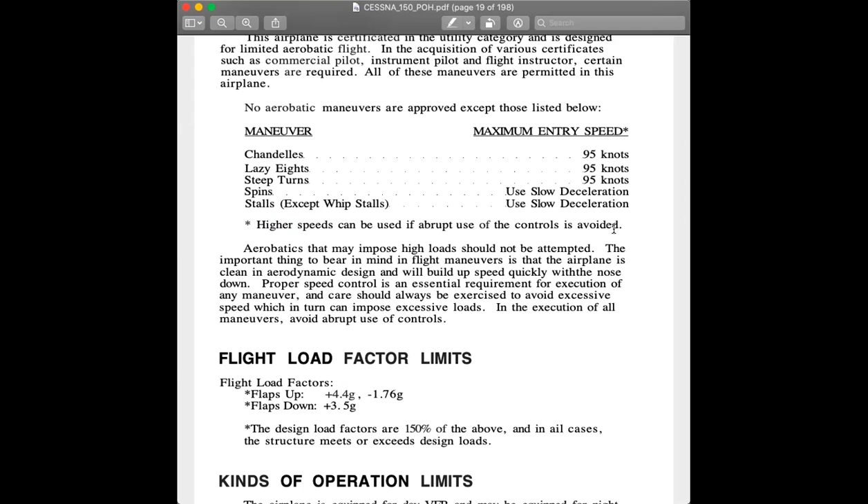Maneuvering limits. Most airplanes put in, hey, these are some suggested speeds for certain maneuvers. These are all maneuvers that you will do probably on a check ride at some point, whether it be from steep turns to some of the commercial maneuvers, like Chandelles, Lazy Eights, 95 knots. It's placarded as a maximum entry speed, and generally speaking, there's a note, higher speeds can be used if abrupt use of the controls is avoided, right? The reason they say abrupt use of the controls is avoided is because of what we talked about in the beginning with maneuvering speed, because you don't want to be in a position where you're overstressing the airframe.

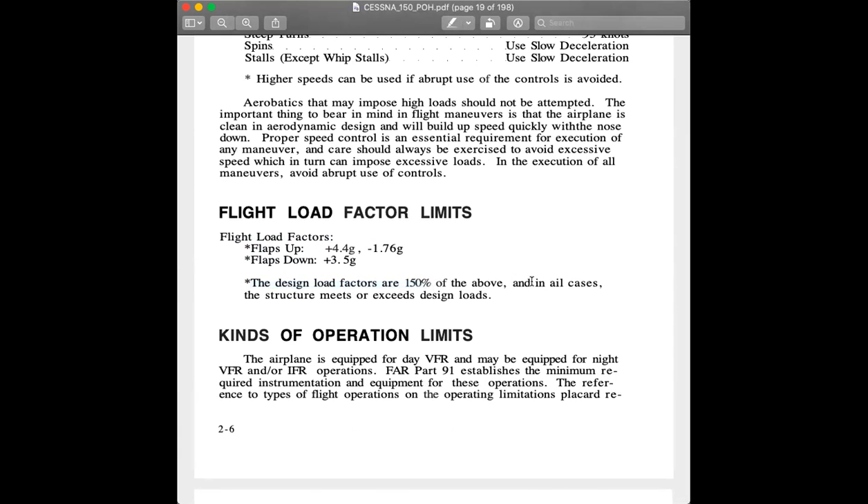Flight load factor limits, right? This is the 4.4 with flaps up, 3.5 with flaps down, 1.76. Oh, there's that note I was just talking about. Design load factors are 150% above, and in all cases, the structure meets or exceeds design loads. So there's the safety buffer.

Kinds of operations limits. This basically just tells you, hey, what equipment's on board your airplane? What can you use it for? What is it certified for? What can it do? What can it not do?

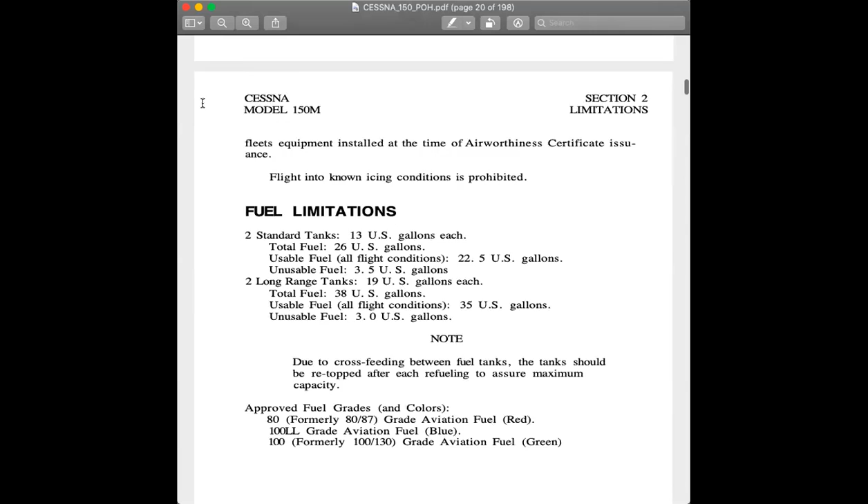Fuel capacity - we've got the fuel you can actually put in the tanks, and then how much fuel is actually able to reach the engine, because of the shape of the fuel tank and whatnot. There might be some fuel that is out of reach of the pickup or collector, where the tank drains, that might be outside the reach of that when you're in flight for whatever reason. So not all of that fuel is usable. That's something to consider.

Fuel tank options, that's a big one to think about. A lot of people fly a lot of different airplanes. Maybe you fly an airplane you've flown before, flown multiple different 150s. Being familiar with your airplane, knowing if it has the long range tanks or not. I know people who've been surprised when they landed places to get fuel and put in more fuel than they thought, because they didn't realize the airplane they were flying had a different size fuel tank than other airplanes of that exact same make and model.

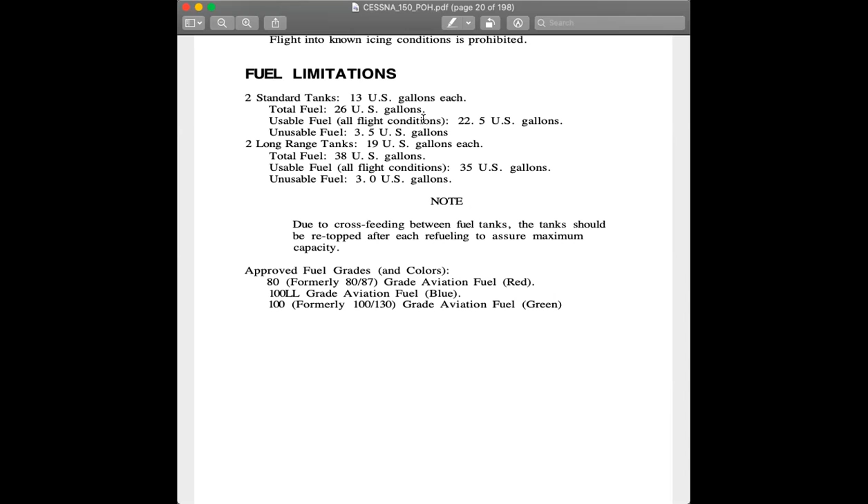Just like your car, there's optional equipment. Not everything has the air conditioning seats these days - there's still plenty of cars you can get without it. So just consider those optional features. You can cross flow. Placards tell you, hey, these things are supposed to be in your airplane. There's supposed to be signs that say this - check those all out. And that's it, so that's the limitation section of your POH.

A lot of good information in there. Depending on the airplane, it'll be longer or not. Any questions about limitations? If I wrap that up, I know we spent a lot of time talking about aerodynamics, because that really applies to most of that section. It's kind of the same aerodynamics for pretty much all those speeds - you can derive literally any of them from that example. Otherwise, it's just good stuff about your airplane.

So thoughts? Any questions? Does anybody have? Sydney? Christina got picked on, I loved it. That was great. Rachel, do you have any questions? I do not, thank you.

This is a fantastic review, I appreciate it, it really is. James, you did an excellent job, really, it was good. I know you could go on forever too about more and more good stuff. So Flight Apprentice does such a good job because you guys write all your own material, and it's all good, precise.

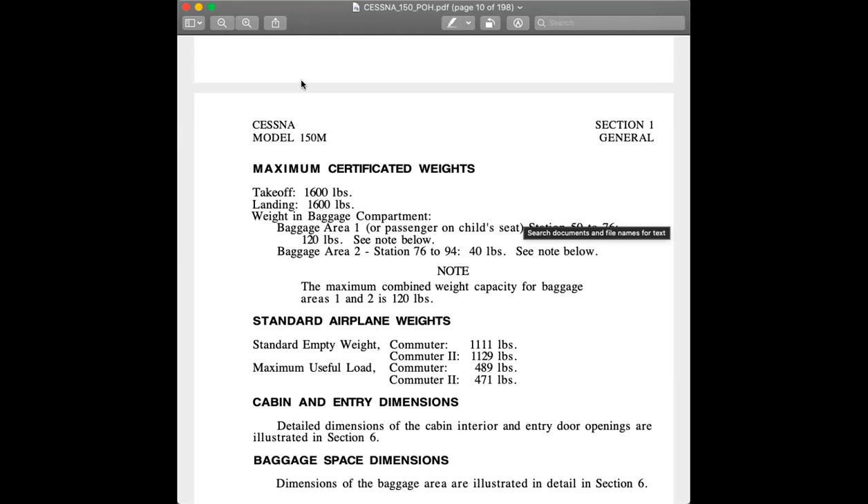I have no interest in ever watching this video, so I'm not going to put it in my professional portfolio or anything, but thanks for hanging out with me everybody, this was fun. Like I said, it was a good practice run for figuring stuff out. Next time I'll actually have my stylus, my drawing pad. Like I said, I opened my box and I was like, where is the pen? I don't know where it went, so funny.

I literally just gave him like a couple hours notice. I'm like, hey, you want to do tonight? Since we don't have anybody that can do it except for me. And he took the pressure off me having to plan it out and just took it over.